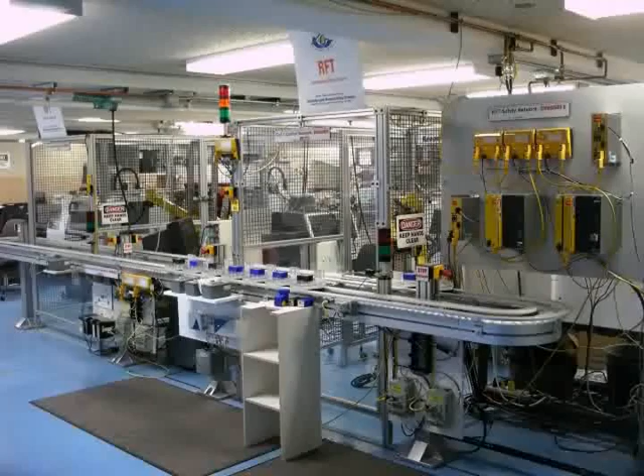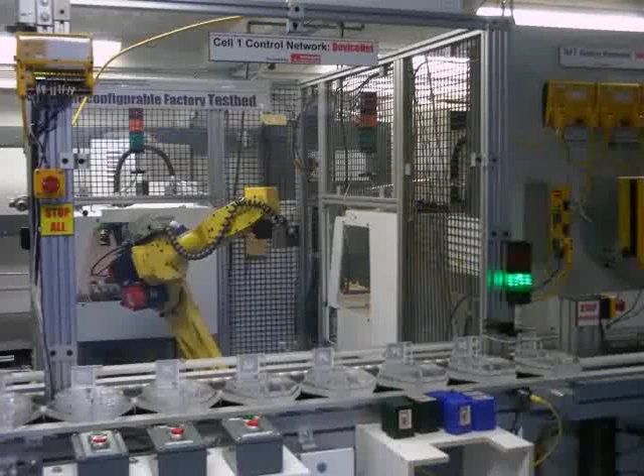This is the RFT. The hardware comprises two mirror image machining cells connected by a conveyor. Each cell has one FANUC robot and two Denford 3-axis milling machines. This is cell 1. The milling machines and robot are connected through DeviceNet and controlled by the ERC Modular Logic Controller, which uses modular finite state machine methodology.

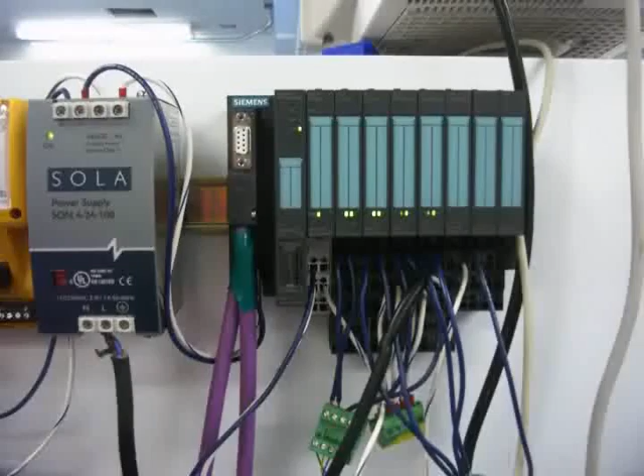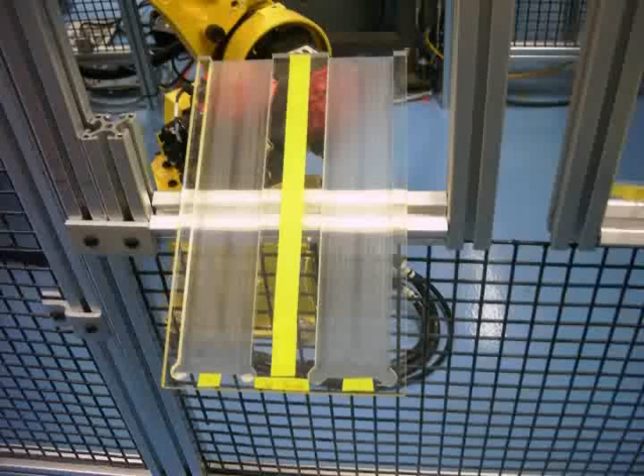And this is cell 2, which is connected using Profibus and is controlled by a Siemens Soft PLC. The two cells are linked by a FlexLink conveyor. Different components on the conveyor, like proximity switches, pneumatic valves, and the conveyor drive, are connected through DeviceNet and controlled by a Rockwell PLC. In addition to the conveyor, these ramps are used to transport parts in and out of the cell.

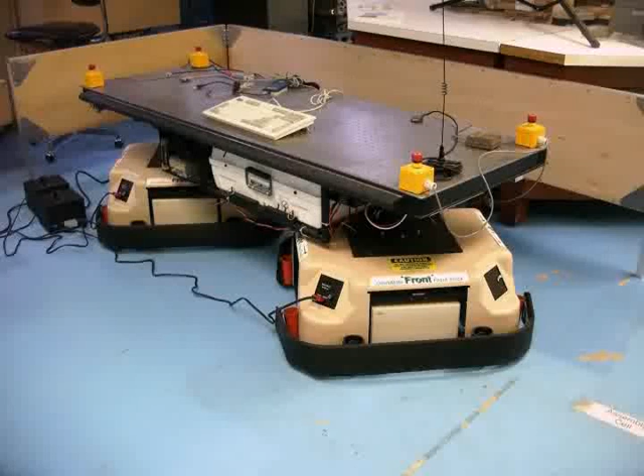We also have a virtual factory component which was built with commercially available software and is used for simulating and testing our control and reconfiguration logic. The virtual factory contains a virtual machining, inspection, and assembly cell that are controlled by a Siemens Soft PLC. The AGV transports parts from the conveyor to our virtual factory. It is connected to the system-level controller through OPC over wireless Ethernet.

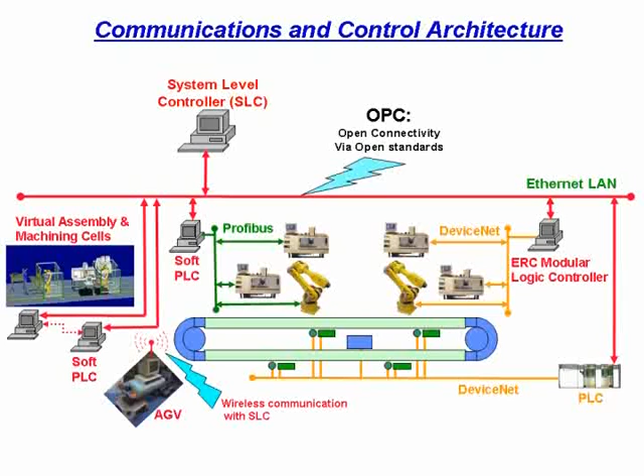All of the cell-level controllers are connected through a system-level Ethernet network to the system-level controller using OPC. The system-level controller is based on ERC Modular Logic Control. A Pilz safety bus network controls the safety shutdown of the RFT.

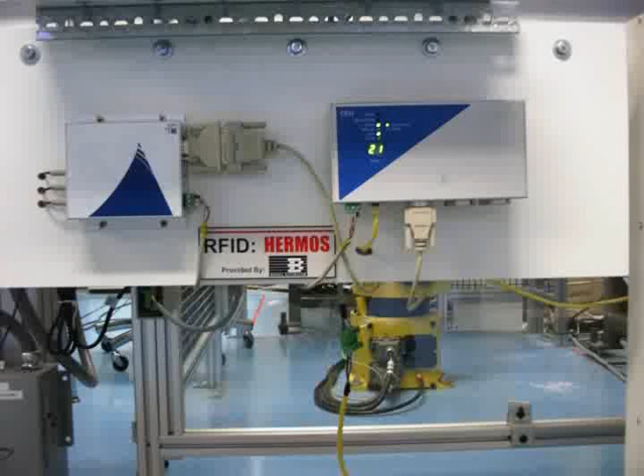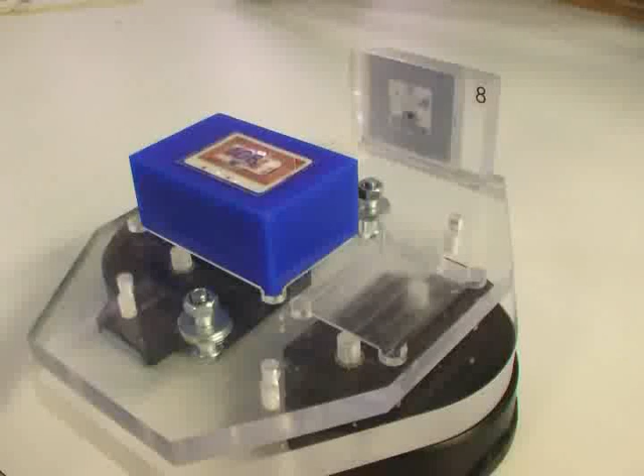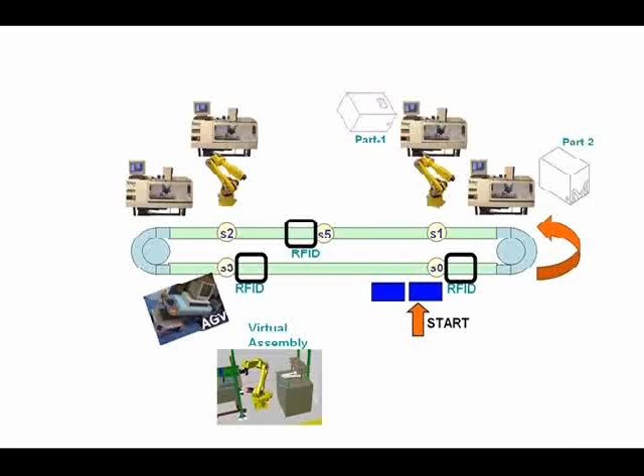We have installed a Brooks Automation Hermos RFID system on the RFT to have process, product, and people traceability. Pallet and part tagging are implemented in both the physical testbed as well as the virtual testbed areas. The system is able to track every pallet and part from the physical testbed's loading area all the way to the virtual assembly cell.

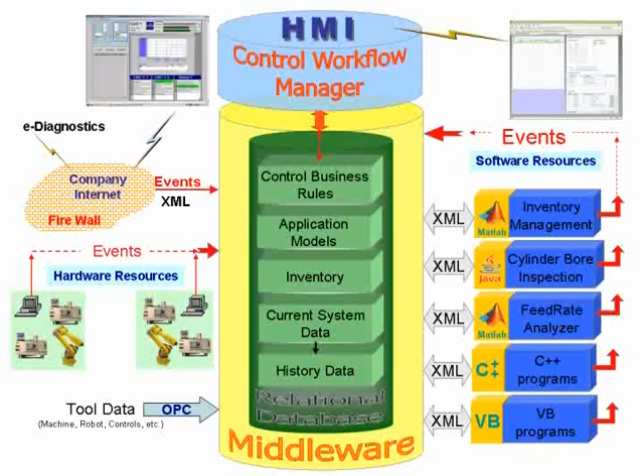The Open Software Integration Framework provides the software architecture and methodology to connect all of the software components of the RFT, allowing for rapid prototyping, integration, and transfer of newly developed software solutions. The architecture is event-driven and data-centric. The central point of interoperability is the database, which stores system and application data as well as workflow rules. The Control Workflow Manager defines workflow rules to govern the uses of software modules written in various languages. The middleware is written in Java and the entire infrastructure adopts a web services approach.

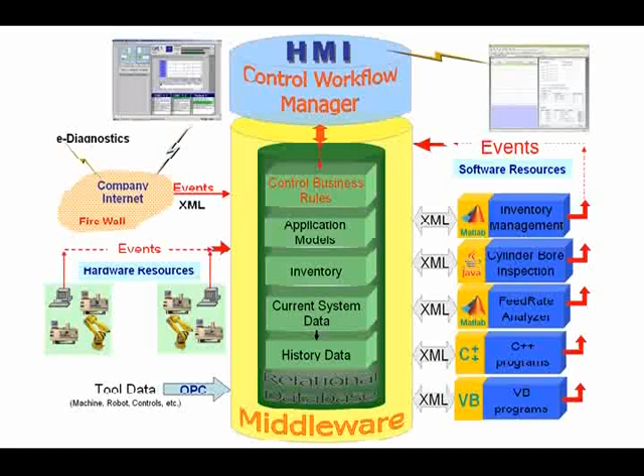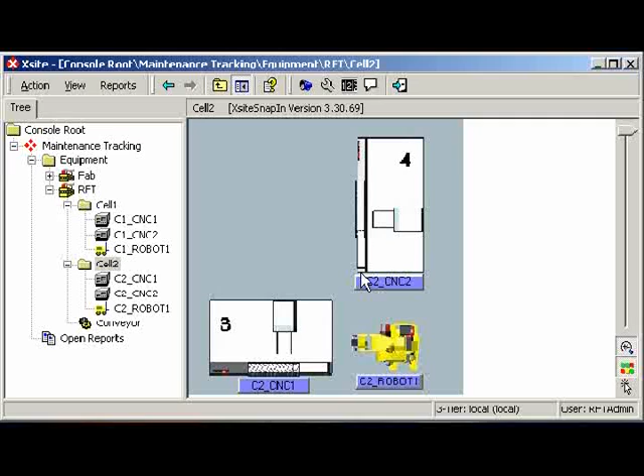A computerized maintenance management system, or CMMS, is one of the software modules integrated with the RFT. It handles both unscheduled and preventative maintenance scheduling on the RFT. This is an operator view of the CMMS. We have currently modeled the RFT including cells 1 and 2 and the conveyor, which can be seen in the frame on the left-hand side. Preventative maintenance schedules have been set up for the CNC machine and the robots.

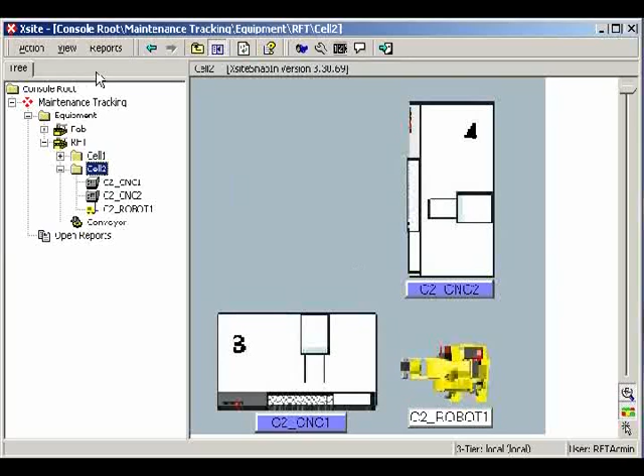This is an example of an unscheduled work request on a robot. It is indicated on the CMMS screen by the flashing red robot image. An operator can click on the work request to see any comments generated with the request. This particular request asks for a robot inspection. The operator can now log onto the request to perform necessary work. The CMMS changes the state of the robot to under maintenance to indicate that someone is performing work on the robot.

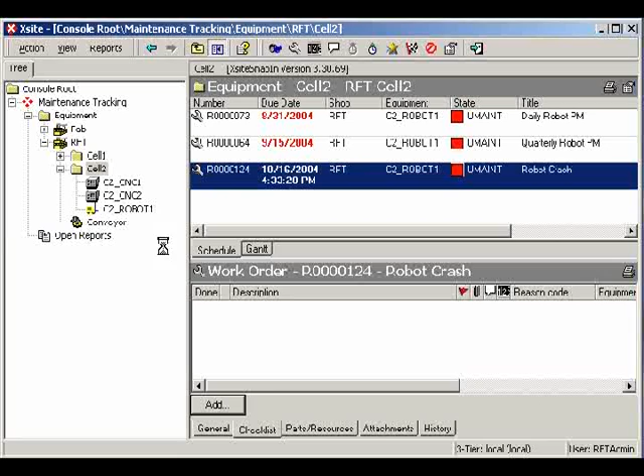The operator can now add a work template to the work request and perform work. Once the work has been done and the problem identified, the operator may add final comments and complete the work order.

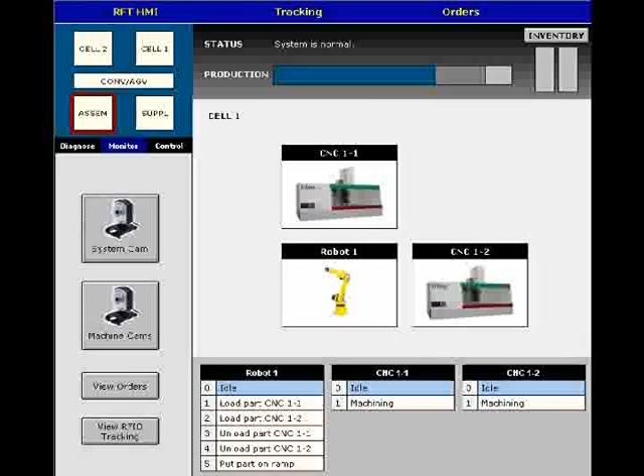The RFT's web-based HMIs allow remote access and monitoring. Information displayed on the HMI includes streamed video, component status, current process, and sub-HMIs for RFID, part ordering, and diagnostic signals.